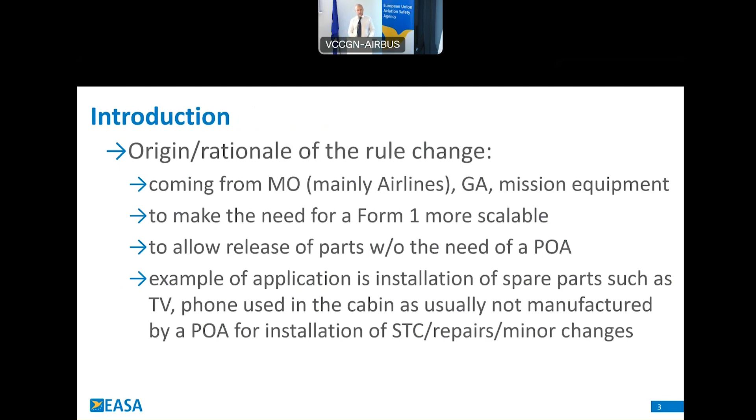Some examples here, it's not limited to that. I think there were ideas in the beginning to really focus just on commercial off-the-shelf parts. Some of you may be aware of the initiative of the FAA on that, which is focusing on commercial parts. We decided to take a broader approach and identify parts that can be installed without a Form 1. Of course, commercial parts are also included, but it's not limited to that.

So in a nutshell, the main regulation affected is 307. It was already there. There were already derogations in that regulation that could be used to install parts without Form 1. Those derogations are not changed, so they can still be used as before. There was some renumbering because we had to provide some clarifications, but those regulations, which are today B1 and B2, are not changed.

What has changed, which you see here on the screen identified as new, is the derogation in 3, 4, 5, and 6. And I will explain them today, so I will not focus on the details on this slide.

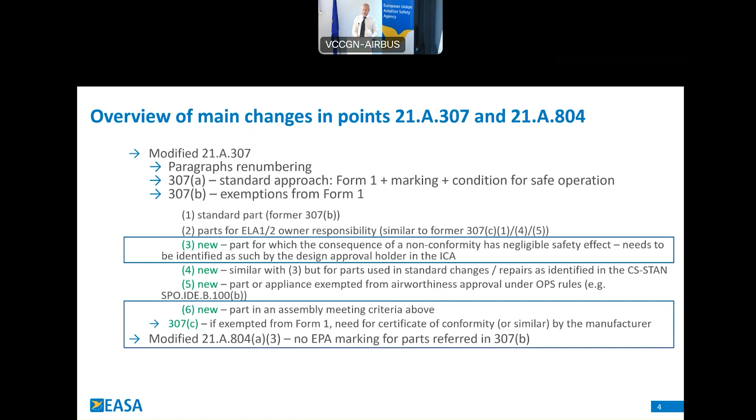B3 and B4. B3, I would say, is the main one, and it occupies 80% of the certification memo. It is the derogation according to which a design approval holder can identify parts that, in the case of a non-conformity of the part, so we are discussing just the manufacturing of the part, not the design of the part.

So if the part is not conforming to the design, then if the effects of such a non-conformity are negligible, that part can be identified in the ICA of the aircraft as not requiring a Form 1. So it's very important. It has to be done by the design approval holder.

I will explain also what it means. It's not very clear, but here are specific verification activities. So those can also be used by the design approval holder to help identify those parts. But I will explain this better in the next slides.

B4 is similar to 3. It makes the link to CS-STAN. As many of you know, CS-STAN provides designs which are approved already at the regulation level, so they don't have to be reapproved. And also for those parts, EASA can identify that some of those parts do not require a Form 1.

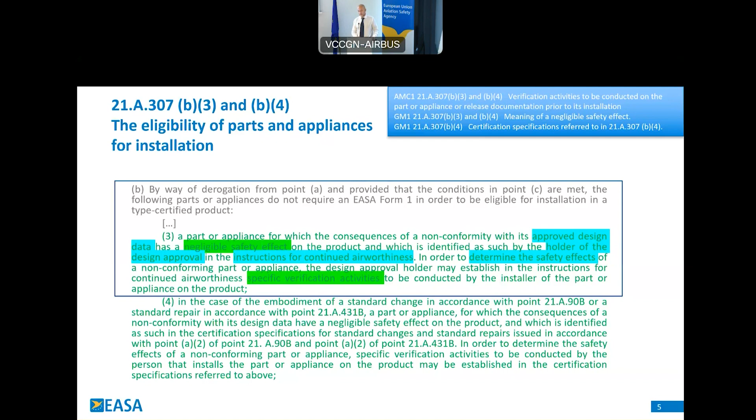I'm sorry about the coloring. It appeared different on the laptop. I realize it's not very easy to read, but somehow it does.

So that's the first AMC to B3 and B4, which explains part of the concept and explains that verification activities can be added to ICA to identify if some parts can be installed without Form 1. What does it mean? It means that the design approval holder will have to do an assessment, which I will explain. And with that assessment, they can identify that the effects of a non-conformity are acceptable because they have a negligible effect. And it may be that as part of the compliance demonstration, there were some activities that were the only critical part for that part. And they can translate those activities into verification activities.

An example is provided here. So, for example, if for a cabin interior part the only issue was about flammability, and if they can provide to the installer such instructions, if the installer can check that flammability requirements are met with a certificate, for example, then the part can be eligible. But it's important that this assessment is done by the design approval holder.

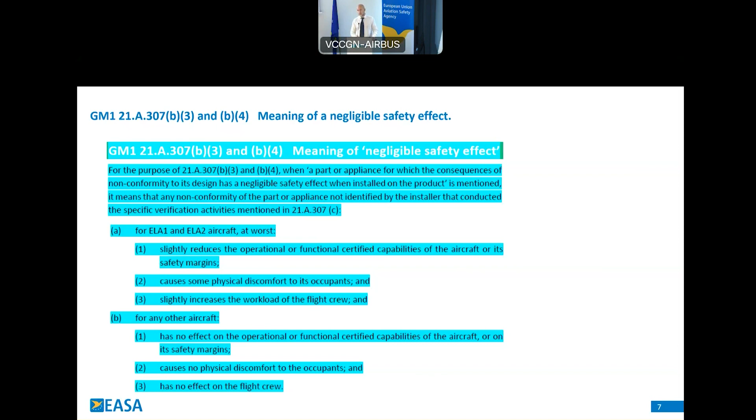While for any other aircraft, we have similar definitions, but with more conservatism. And in this case, again, 1309 is a link, clearly, as you can see. But in this case, we looked at the criteria for no safety effect. So if after the assessment they can conclude that this is the effect in case of a non-conformity, then that part can be eligible for not requiring a Form 1, if the design approval holder wants to do it. So they have to decide to do it. They don't have to. It's not a must for them. They can take the option, but it must be done by the design approval holder.

Then we have 5 and 6, which are two additional points. 5 is pointing to OPS rules. You may be aware that some parts in the OPS are identified as not requiring to be approved according to Part 21. So those parts as well can be installed without Form 1. And 6 is just clarifying that if a part is part of a higher assembly for which the derogation was used, then also those subparts can be eligible. Again, if the design approval holder wants to do it.

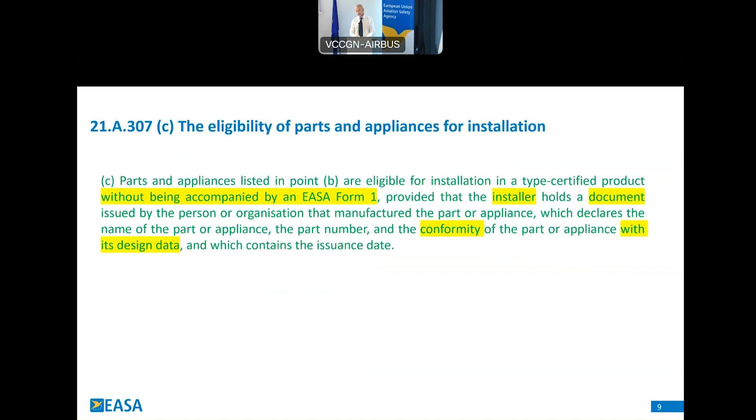And last but not least, 307C is explaining that even in that case, but this should not be an issue, because of course we want to have a minimum of assurance that the part comes conforming to the design. So in every case, even for parts where Form 1 is not required, there must be something that attests conformity. It can be a certificate of conformity, but not only that. And here as well, in the memo, I will explain what kind of document we can expect. And now a few words on the certification memo.

As I explained, we had already issued one. It was published, I think, around 2013, if I'm not mistaken, which identified what the derogation was back then. Back then, the derogation was for standard parts and owner-accepted parts. It's out of scope today, but standard parts, I think we are all familiar with. Owner-accepted parts: you have to know that for ELA 1 and 2 aircraft, the owner of the aircraft can propose to install on his or her own aircraft some parts without a Form 1 if they respect some criteria.

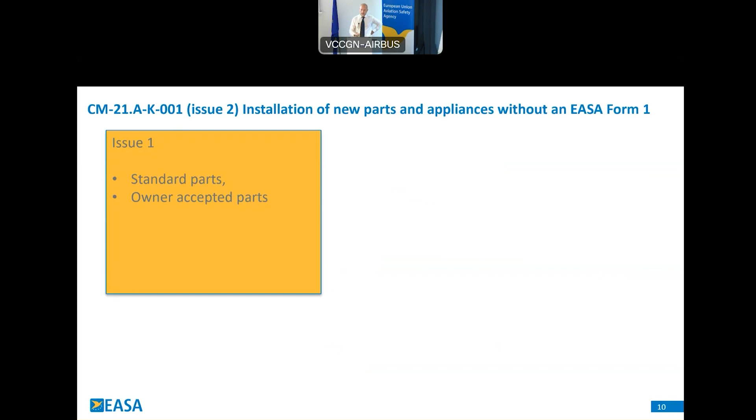It's still based on criticality, but there a slightly different approach was followed, with less conservatism than what we have in the derogation B3 and 4, because basically the owner takes responsibility for their own aircraft. What came with issue 2 is that we left standard parts and owner-accepted parts, but we included the new derogation in B3.

And I will explain this. In a nutshell, what the cert memo provides, it explains the structure of 307 because we identified that there were differences. So we went through all the points and explained why we did what. It's explained again, the parts on B1 and B2 are kept. So you will find more or less the same wording with some adjustment, because of course the rules changed in the meantime, but the concept remains.

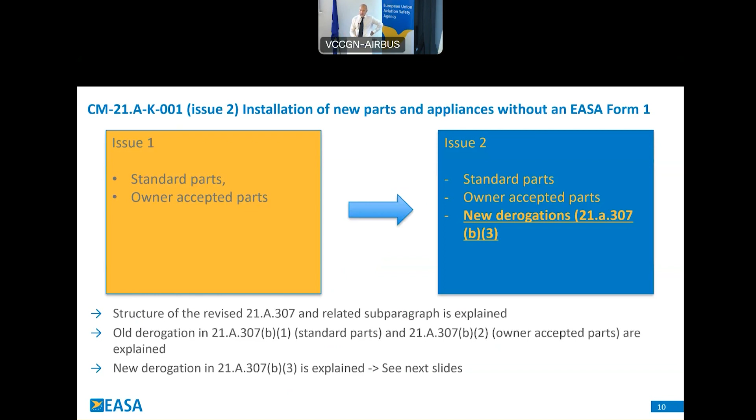And then we had a lot of details on B3, which I'm going to explain to you in the next slides. So the first point is who can use the derogation. That was a very long discussion. So in the CRD, we received some comments on that.

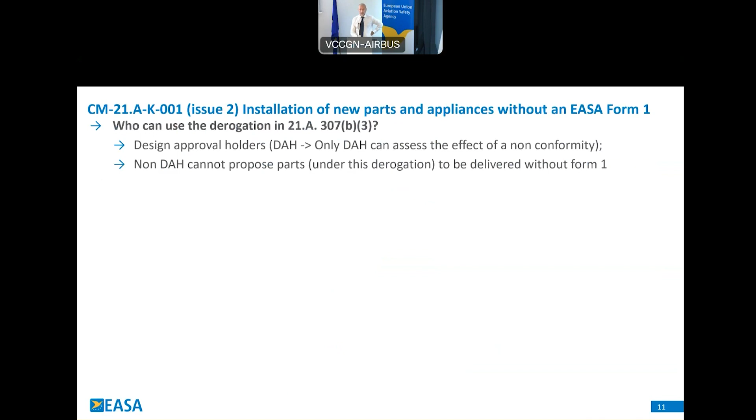And you have to know that we tried to identify a list of parts that could be eligible for such a derogation, but we ended up in an assessment that almost 99% of the time we said, no, we can't make the assessment ourselves. It must be done by the design approval holder because they know what it means for that part to be non-conforming on their design. So only the design approval holder can propose those parts to be delivered without a Form 1. And again, it's not a must. They can do it, but they don't have to do it.

We explain what negligible effect means. Of course, it's linked to the compliance demonstration. So as we know, we have also requirements in Part 21 for ICA. So we expect that as part of the compliance to that requirement, if ICA are part of a certain change, the design approval holder, applicant before being the holder, has to make the assessment, if they want to use the derogation, that for those parts the effect of a non-conformity is negligible.

You will see that, or you maybe know already, that in the certification memo there is an appendix which provides a table that gives some examples of how this assessment can be recorded. They are examples, they can be used. The design approval holder will have to make sure that those examples fit their case. And this is part of the compliance demonstration that they will have to propose. And it will have to be assessed before issuing the declaration of compliance.

So clearly it's linked to the compliance demonstration, and this is where the verification plays a role, because depending on how deep the compliance was for some parts, that part can provide criteria that can be used to ensure that the non-conformity effects are negligible. It's very important: the use of the derogation has no impact on classification of change. So the derogation can be used for a minor change or for a major change.

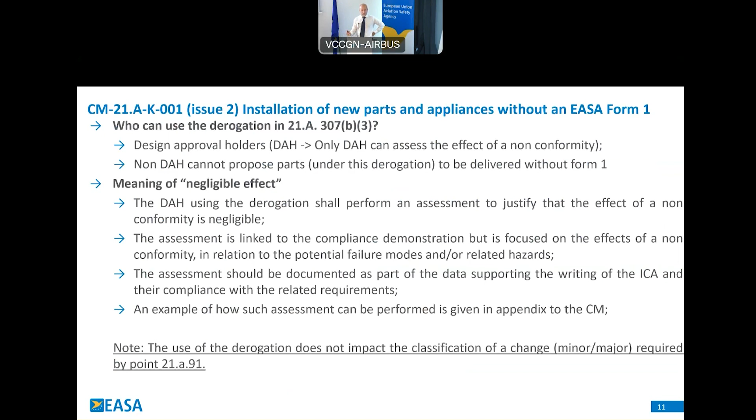It can actually be used also by the holder of the design through 21A90C, if I'm not mistaken, which is a new requirement for ICA, where standalone ICA can also be approved. So also as part of this standalone ICA approval, such derogation can be used. And of course, the process will have to be approved within the DOA procedures. But nothing to do with classification major or minor. A minor change does not mean that the part can be installed without Form 1. At the same time, a major change does not mean that they cannot be installed. So it can be used in both cases.

They have to be identified in the ICA. So we expect that the installer of those parts clearly sees in the ICA, in the way that the design approval holder finds suitable for their ICA and manuals, that certain parts can be installed, and in the same location they can identify which verification can be done to apply the derogation.

We had a lot of questions whether a new part number has to be identified for those parts. As you all know, it's a decision of the design holder to give their part number or to use the commercial part number of a part. In case they want to use the derogation, they can change the part number of that part. They don't have to. We thought about cases where this may be useful.

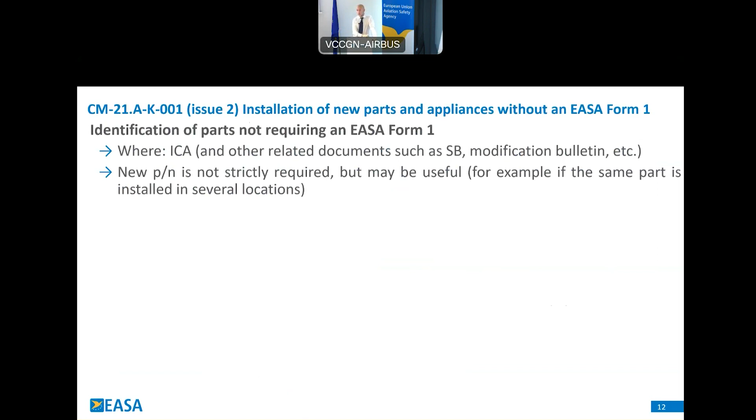For example, you may have one part which is part of an aircraft and it's installed in many locations, but only in some locations the effect is negligible. So the design holder can think, okay, for that part, in order to avoid confusion, I will give a specific part number. It's a way, it's not the only way. It can be done also in other ways.

And they have to identify in the ICA also if there are additional verification activities. It's important to clarify, those activities have to be simple in nature. So first of all, maybe a step back. Of course, we expect candidate parts for this derogation to be parts which are not bearing safety function. Typically, they are commercial off the shelf. It's not only that, but they should not provide information which are important for the conduct of the flight or for the safety margin of the aircraft.

But still, as we know, some parts can have an effect on safety even if they are not bearing safety function. In case of a failure, we want that they do not spoil other parts. So that has to be assessed. And typically, this is what we expect to be of support for identifying verification activities for the installer. Some examples that you see here, some technical data. So in some cases, it may be enough to make sure that the part is meeting the certification assumption that certain geometric data are met.

In other cases, availability of test certificates. We made the example before of flammability test. We received questions of what kind of test certificate we have to indicate. I think this really depends on the case, and it's the responsibility of the design approval holder to identify if that type of evidence is sufficient in that case. We will review case by case. We hope we can give better guidance in the future because, of course, we are still in a learning phase.

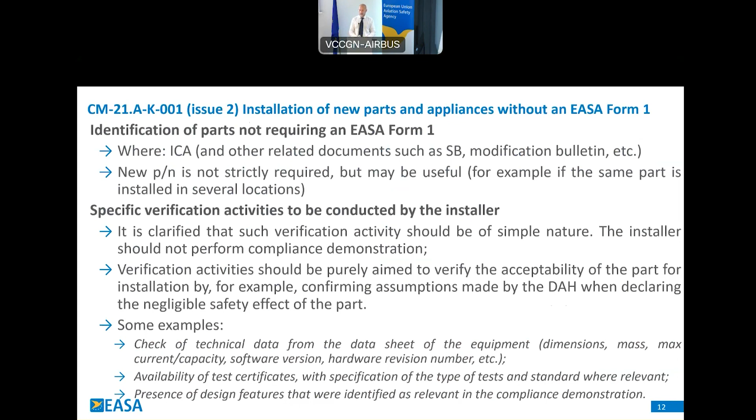And I have to say, I will be very honest with you, we are still discussing internally about that, but the bottom line is compliance demonstration is done during approval. Installer can do some check on the aircraft, but they don't have to be a repetition of compliance demonstration. They have to be aimed to make sure that the effects of a non-conformity are not affecting the safety of the aircraft.

Regarding conformity, so Form 1 is not required. Form 1 is an authorization release certificate. It has a specific meaning. It bears a lot of information with it. It also provides the goal of ensuring conformity, but when a Form 1 is not required, we want that conformity still to be there. And this is not something that aviation has invented. Conformity is an issue for all industry, so we have a way to do that. C of C is one way, but it's not the only way.

And you have to know that this is also providing information of conformity, how it's proved for standard parts. And so we have been quite flexible on that. It's important that one can see for a certain part what is the part number and what is the manufacturer of that. Because ultimately, if there is an issue, there has to be means to assess what was the issue. It's important to think about occurrences, of course.

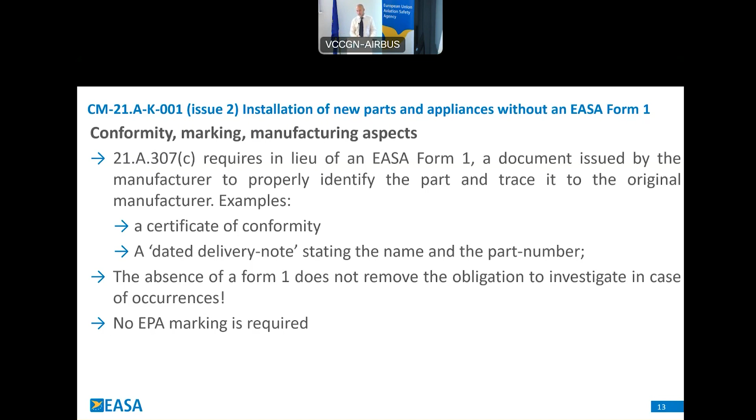So typically, we would not expect that a part identified as not requiring a Form 1 can lead to an unsafe condition. So if that's the case, clearly there should not be. But we cannot exclude that within an occurrence, there could be the need to assess that. So we said, okay, in the cert memo, it is clarified, should not be the case, but if required, the design approval holder has to make their investigation anyway. They cannot say this part is without Form 1, it's not our problem. They have to investigate and take into account that lack of information. And last point, there is no need of an EPA marking according to Subpart Q.

Last point on international agreements. As we know, there are bilaterals in place. Bilaterals address also Form 1, Form 8130 for the FAA. So when we are working within bilaterals, we cannot use directly this relaxation. There are discussions ongoing. It's not clear how long they will take, but as many of you know, also the FAA has a similar concept. And of course, it's slightly different, so we have to find a way to align, ideally also with the other authorities. So within the bilaterals, we cannot accept.

So if you identify in your design parts that do not need a Form 1, if you validate that in the States, it's not an automatic recognition of that. It's even the other way around, because the bilateral expects that there is an ARC. So you will have to work with Form 1 and 8130 for the time being. Differently, if a certain design is approved in Europe and there is no bilateral, if they use the derogation, that's okay. And of course, if it goes on any other non-EU register, then it's for the state of registry to check what they expect.